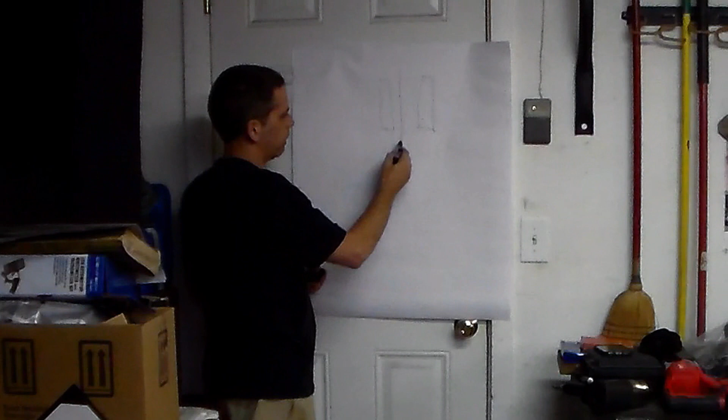So when I'm doing that, then I'll draw a guide here in like two parts. So this is our guide, and then this is our valve that's riding in the cylinder head. And you have a certain area of wear. It's not going to wear all the way to the bottom or the top, and you got an area where it's going to wear and stop.

So I'm measuring two different things in this case. I'm measuring the valve stem at what I call a top, middle, bottom. You can even call that out. And I'm measuring the valve guide at the top, middle, bottom as well here.

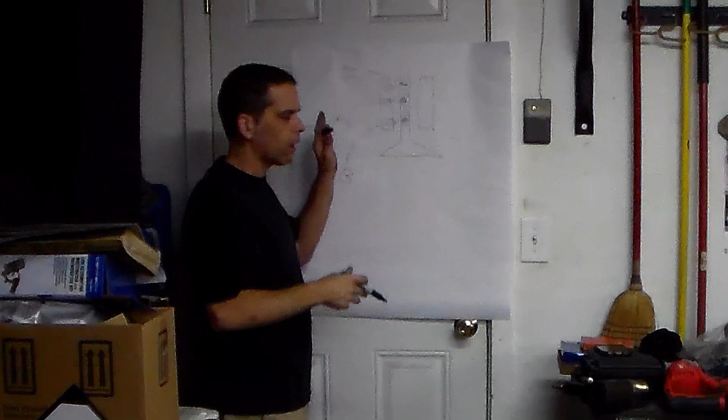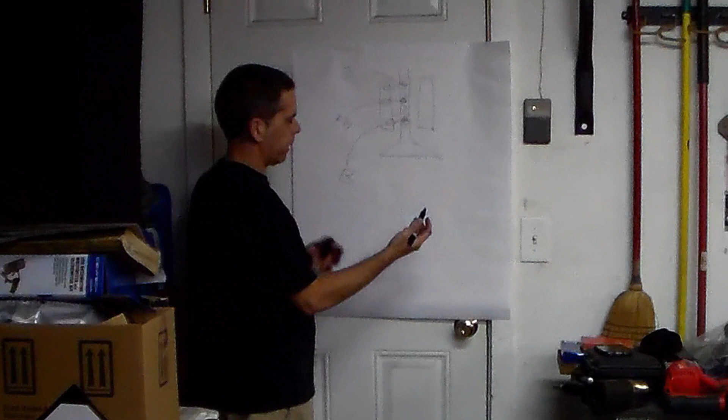And what I'm going to do then is I'm going to get top, middle, bottom for all 16 of these valves, and then I'm going to subtract the differences. So with the intake valves, you should have anywhere from 1 to 3 thousandths, and this is the intake.

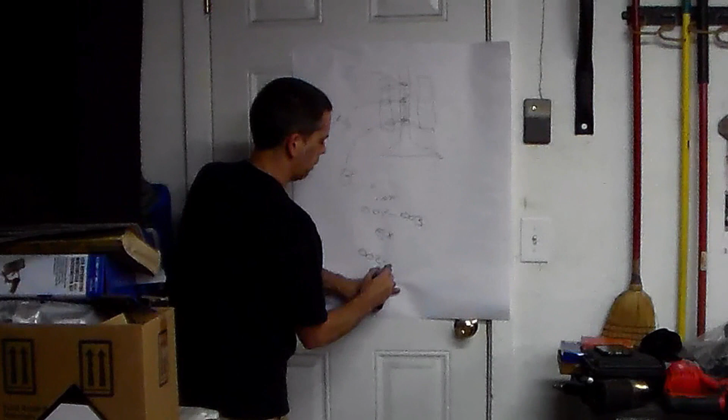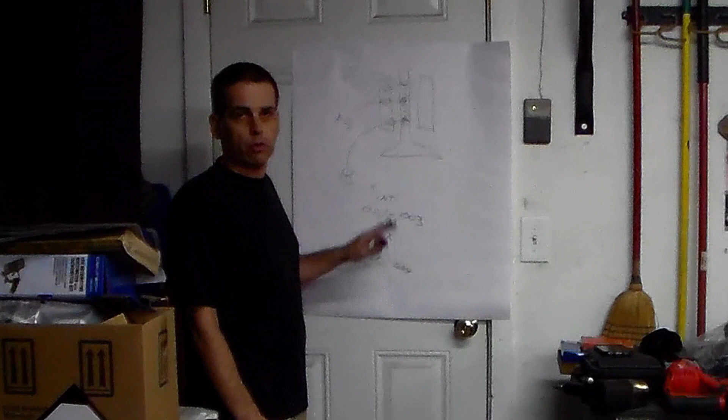And the exhaust should have, you're allowed 1 extra thousandths because of heat expansion with the exhaust valve. It's going to run hotter than the intake valve. Now always check your specs, of course, and see what the manufacturer recommends. But a good rule of thumb, especially with an old cast head like this, is again 1 to 3 thousandths clearance on the intake and 2 to 4 on the exhaust.

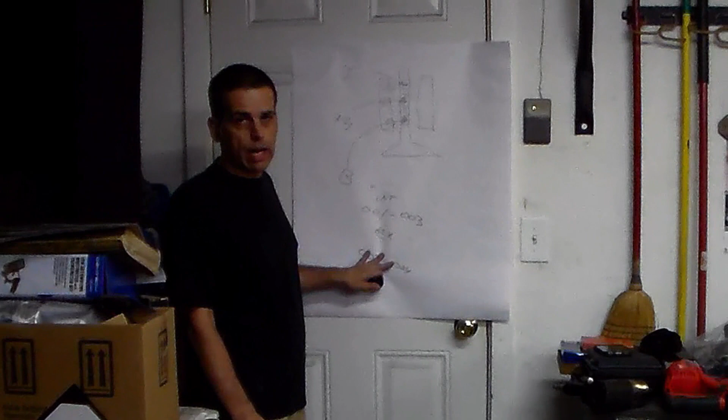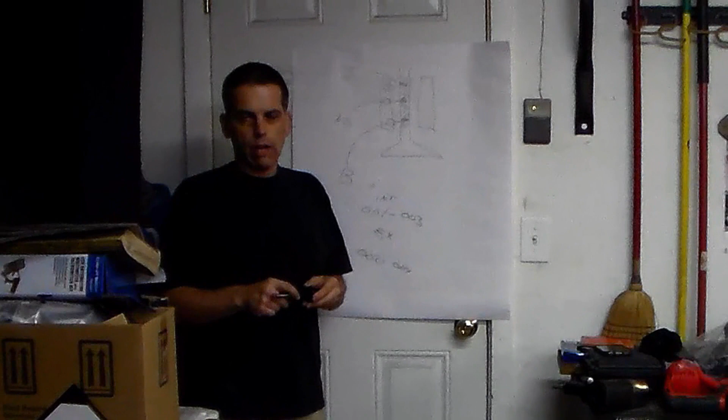If we have any more than these specs, then we're going to have the guides replaced, or if the valve stems look really, really scored, we will have to get new valves as well, because the guides might all be scored. Typically, unless you have an oil delivery problem or they were really running low on oil or had different issues, most of the time the valves will clean up.

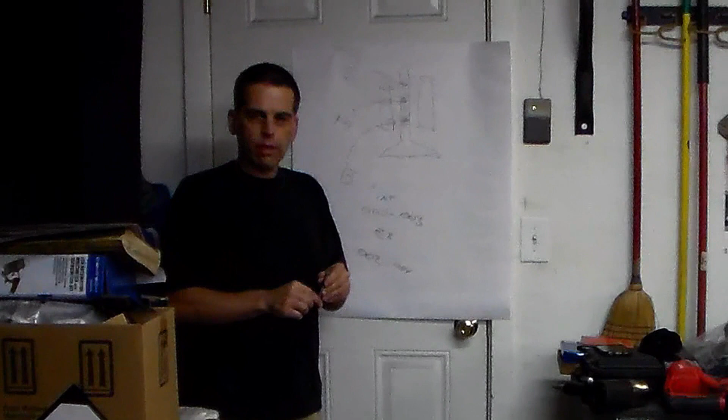You just have to regrind the face and true it to the seat, which we'll talk about another time. But most of the time you don't have to replace the valves. It's not a big deal. So you can always reuse them. So, I showed you this, let's jump back onto our cylinder head and let's get ready to disassemble it.

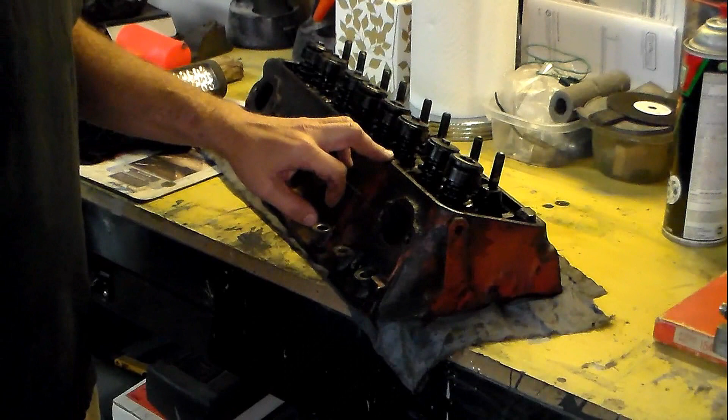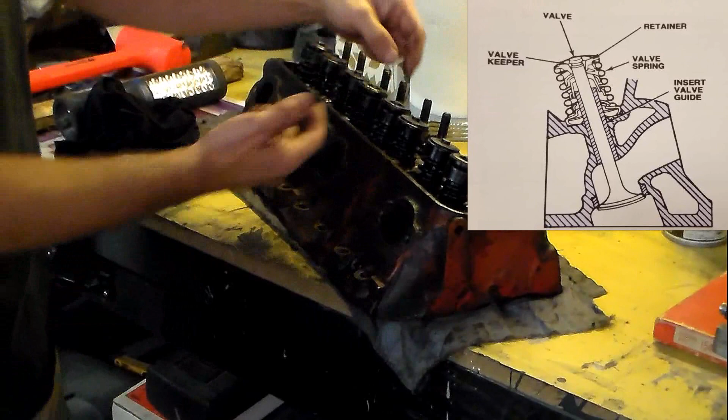Alright, so the first thing I want to do before I do anything is I'm going to take a socket and a hammer and tap on each one of these spring retainers. Because over time, the valve and the keeper are stuck together. And when you put the valve spring compressor on, it might be a little hard to compress. If you had a pneumatic one, it might be a little different. I have a mechanical spring compressor, so it could be a little difficult, but it just helps break this retainer free from the keepers from being on there for so many years and miles.

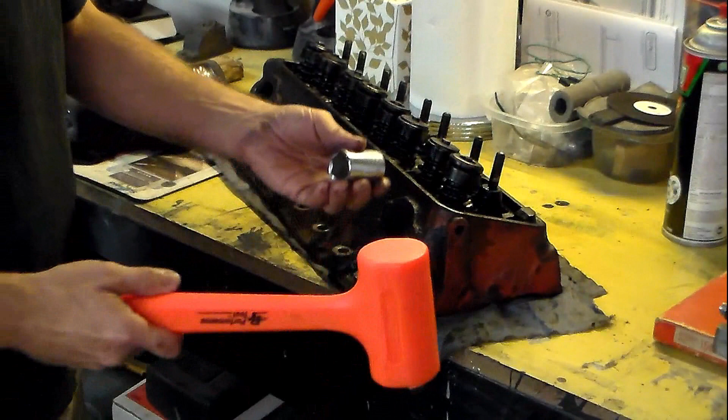So I'm just going to grab an ordinary socket like this and a plastic hammer. You can use a ball peen hammer as well, and just give it a tap like this. The spring will actually move a little bit, that's what you want. Alright, so then I just have a cheap valve spring compressor here. Again, this is a manual one. There's pneumatic and all different types.

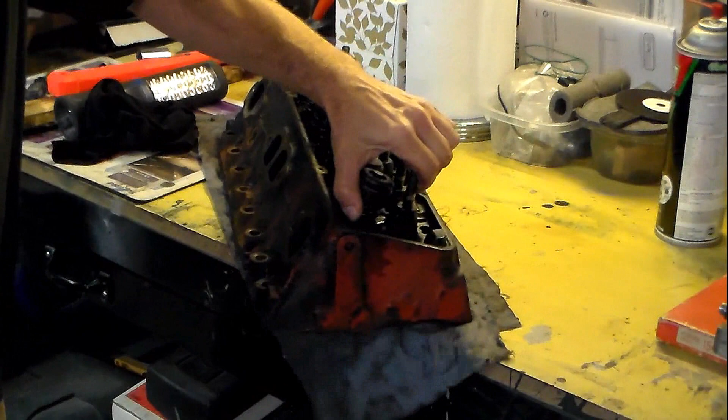And just to show what I'm doing, I normally would never disassemble a head like this, but I am going to leave it hang over a little bit like this, so I can get the spring compressor on, and you can see me take the retainer off here. I already have this set up because I already took a valve out of another head. This goes right in the center of the valve, and this goes across the retainer on the top. You might have to adjust it. You could probably rent these at an auto parts store. But again, I would never disassemble it like this. I just want to show you what I'm doing.

Go like this. Then I've compressed the valve. Now these are the keepers here. To get the keepers out, they might be a little stuck on from oil. And with these particular valves, they have a little pocket down there, and it's got a little tiny O-ring. You have to pop that O-ring out. It's actually a small seal. It probably was an O-ring at one time; right now it's really hard. Otherwise the valve won't be able to come out.

They did this to help the oil drain around the stem and not go into the guide and start burning oil, but they really didn't work very well, but that was 1973 technology. So there's the seal, I'm getting that out. And of course, always keep everything in order. Don't mix anything up, just like you would taking apart any part of the engine.

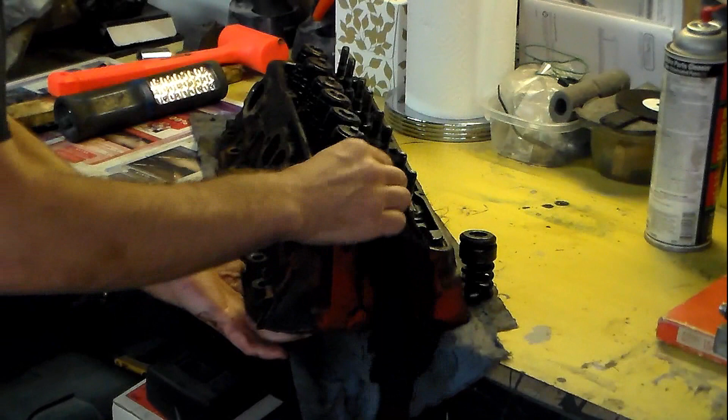Take it out. Now you never want to force it. You can actually get little burrs where these keepers sit from very high mileage, a lot of use in the car. And if you try to pull this down, if you got a burr, you're going to score the guide and probably damage it. So never force it.

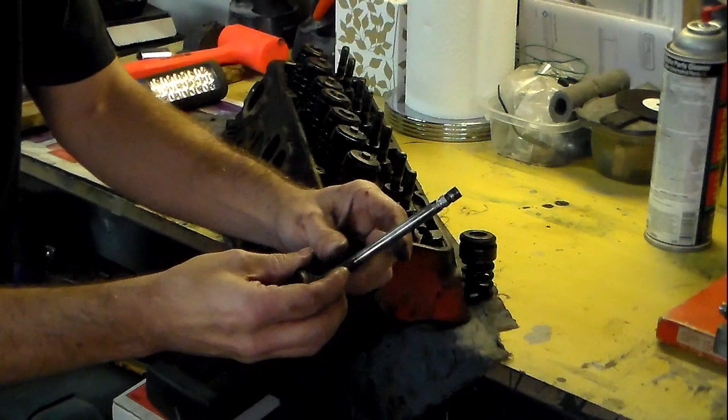Now this one I got all the sludge off, like I said. This one's going to come out really nice. And we got oil on our guide, that's good. You can get all the varnish off the top. But you can see then maybe a little better the shiny areas of where that was basically riding there into the guide and where you have to measure.

So now I need to clean the guide up. You want to make sure when you measure anything it's clean of any debris and oil. So I'm just going to put a rag at the bottom, just kind of spray it out, and try to get as much debris out as I can.

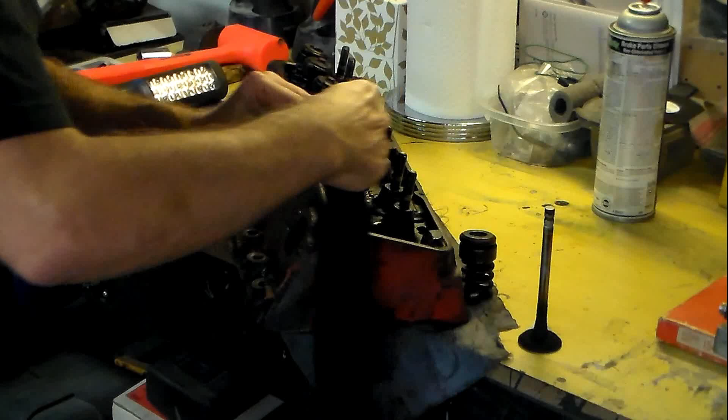Couldn't find any of my rifle brushes this morning, so just have to make do with what we have.

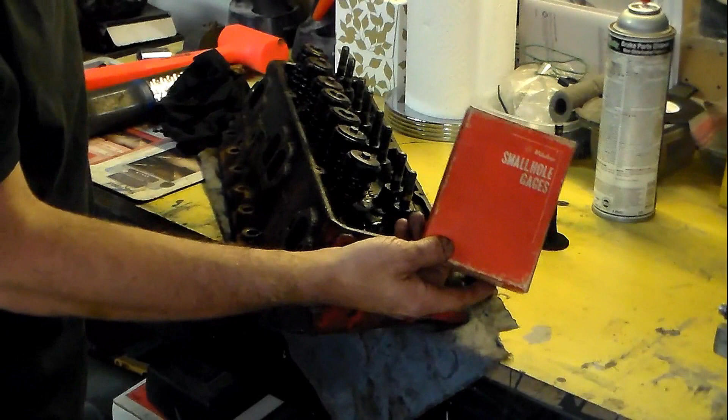Alright, so what am I going to use to measure the guide? I'm going to use a set of small hole gauges. These you can pick up pretty reasonable. I like to stick with old stuff because if it's not broken, it's probably better than a lot of stuff you can buy today. This is an old Mitutoyo set. And then this is the actual one that I'm going to use to measure.

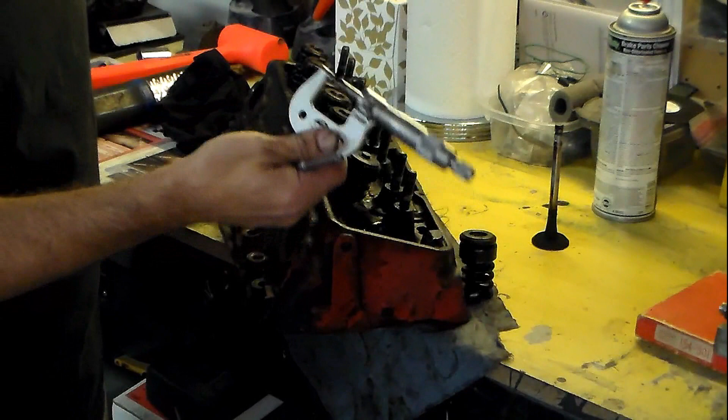And then to get the actual clearance, I'm going to use a micrometer. Now you can use a set of calipers. This is more accurate. I want to go down to 4 digits past the decimal point, and I want to get a very accurate measurement using this micrometer.

So remember I said earlier the rocker moves like this, so the valve's going to move back and forth. So I'm going to take my hole gauge and go in the center. This is what I'm going to call my top measurement, and these two expanding balls out in here are going to be across where the rocker sits. Where the rocker moves, it's going to have the most wear.

So then with this tool I'm just going to tighten it up just so it's a little bit snug. And I'm going to pop it out, and I'm going to get my measurement. So we have, looking at about 25, it's like we're looking at about 3399. So I'm going to write that measurement down, and I'm going to progress then to the middle and the bottom.

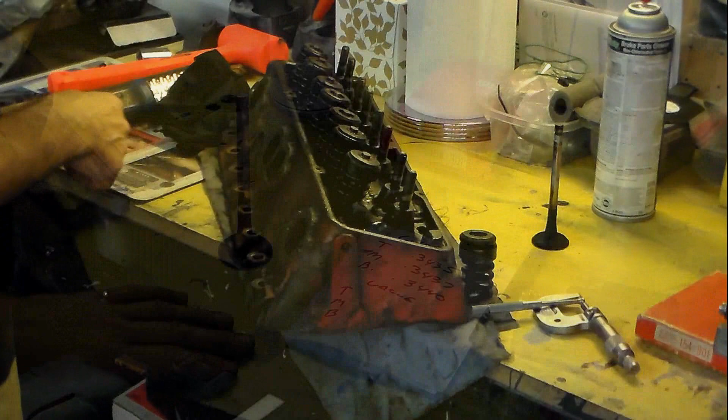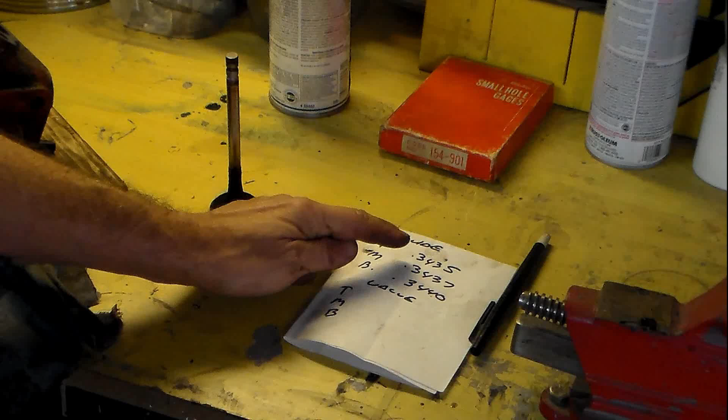So I just measured my guide in 3 places, and the measurement I gave you at the last cut, the 33 whatever, that was wrong. I was looking at the wrong numbers. Maybe I'll edit it out, maybe I won't. So with the top, middle, bottom for the guide, I got these 3 values, and again it's down to the 4th digit past the decimal place. It's more accurate than using a pair of calipers.

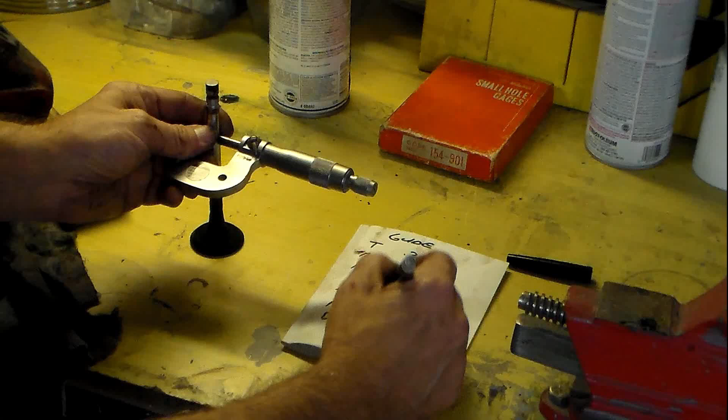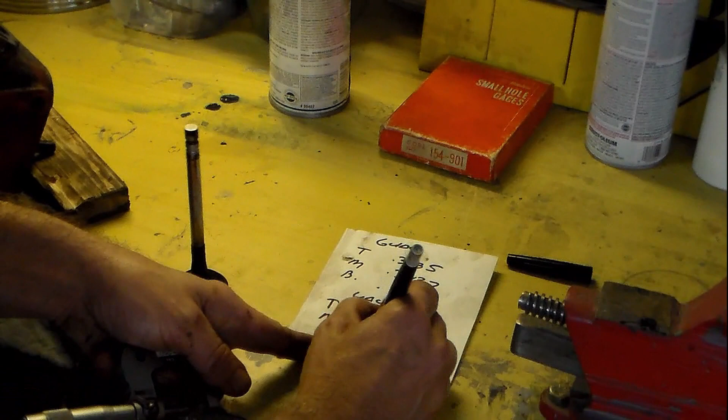Now I'm going to do the same thing with the valve stem. So what I'm going to do here is just measure top, middle, bottom, and that looks like 3412. 3412. 3410.

So I got 15 more to do. I just realized I'm not going to have enough paper, so I got to go scrounge up some more paper. But this is the process, and I'm going to put these all on a sheet of paper for you, and I'll spare you the boringness of doing the math, and I will show you everything that I calculated and see if our guides are good or bad or anything else you might have to do with this project.

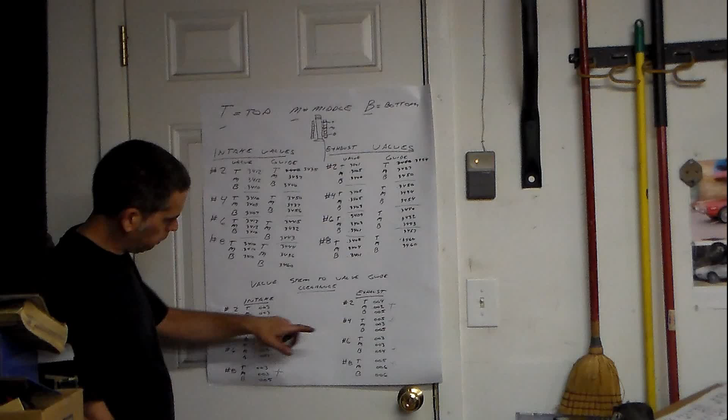I thought it'd be a little bit better, but getting to our max here, I really don't like that because it's not going to be a long-lasting valve job. Now I didn't use any of the decimals; I actually rounded them up. They might be somewhere like 0.0025, 0.0028, but again we're getting close to our max.

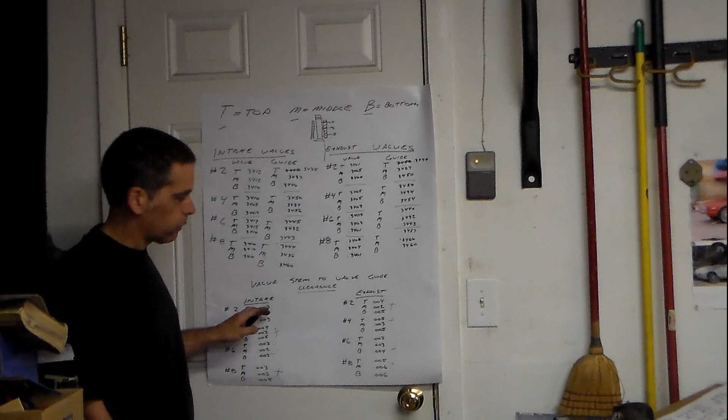So we definitely need 4 guides, and if we're going to replace them because we're getting close to our maximums, then I'll probably just go ahead and get all the valve guides replaced. Didn't want to do that. It's going to hurt our budget, but we'll just have to live with it. Well, I'll have to look at some other alternatives, maybe what I might want to do about cylinder heads.

Now, I'm not going to measure the other cylinder head for valve guide clearance, because from my experience, if you get these kind of numbers on one head, the heads are matched. I believe they're original to the car, so they're going to have the same kind of numbers. So I'm just going to assume that head has the same kind of wear, and we're going to get the valve guides replaced or do something different about the cylinder heads, like I said.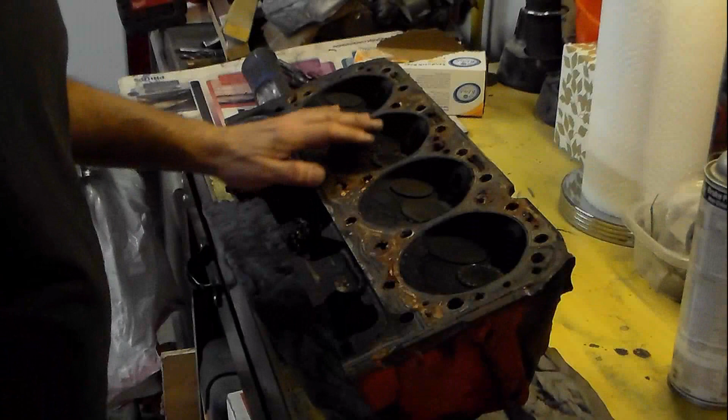So with that, this is done, and now we have to check the flatness of the cylinder head on the surface where the head gasket sits, where it sits on the deck. So let me clean up a little bit, and then I'll show you how we're going to accomplish that. So now we want to check our head here, make sure that it's flat and not warped. And to do that, this surface has got to be super clean.

So I'm going to wipe it first with brake clean, and I'm going to use these red Scotch-Brites on this angle grinder. I'm going to clean this whole area up, and then I'm going to use something with a flat edge on it and a feeler gauge to see how flat it is.

Now I know this is not a true machinist flat piece of metal and people are going to laugh at me, but it will give you some indicator if this is warped or not, and I have used this before and it saved me. This is a nice flat surface, but again it's not a true machinist flat surface. I'll still probably have the machine shop check it. I just want to check it first myself, and I want to give you an indicator of what the machine shop actually does.

So I'm going to spray this down with brake clean, try to get the oil off it, because the oil will dig into those Scotch-Brites and it chews up the pad pretty quick.

These are supposed to be holes, and this is where the coolant sat for a very long period of time. It's actually supposed to be a big hole like there. It just sat, and the head gasket only covers a little part of this with its sealing area, so that's another reason it all sits there. It also could be from not changing your coolant and not taking care of your engine. Things like this can happen, but in this case it's probably just from the coolant sitting in there for such a long period of time without being used.

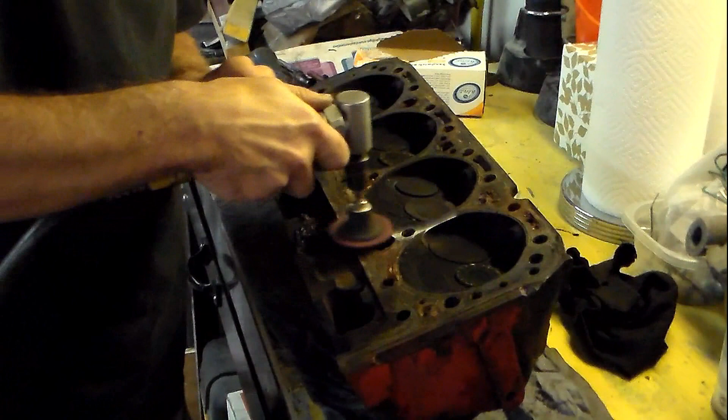Well, that job was invented before fun, because it certainly wasn't. So, I got this whole surface all cleaned up. It's definitely never a fun part of the job. It's always really messy. So all that gasket material and all the debris and everything's off. So what I'm going to do is take my straight edge and lay it in different parts of the head, and I'm going to see if I can get a feeler gauge under it.

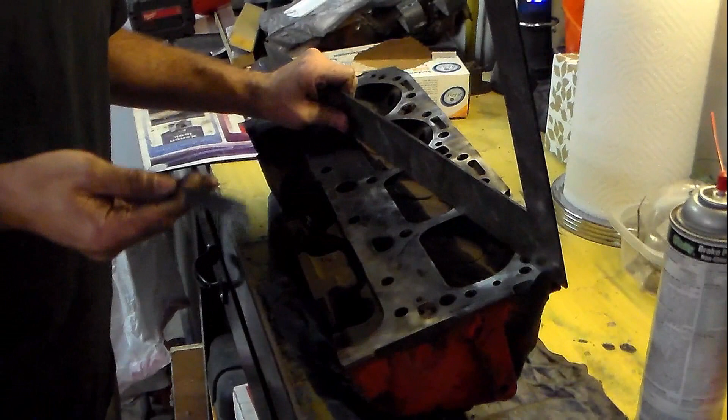Now, a good rule of thumb is a cylinder head gasket can make up for about 5 thousandths variation in any kind of waviness in this surface and the deck surface. Always of course check your service manual and make sure that spec is really true, or it could be as low as 2 or 3 thousandths depending on the type of head gasket, the material the block is made out of, the head gasket material, and everything else that goes along with that.

So for this, I'm just going to take this straight edge, and I have a 5 thousandths feeler gauge, and I'm going to see if I can get it under in these areas. And so far we're looking pretty good. Now if I could get it, I want to check it with the 6 thousandths. And if I can get the 6 thousandths under, then I have too much warpage, and I definitely want to get this surface cut. So what they do is stick it on a large machine, and they run a stone across it. Some older machines have stones, the new ones just have a flat cutting wheel or a disc or a bit. They go across and they just true this whole surface up.

So let me check it in certain other positions. Yeah, see, this is what I thought. The head most likely was not going to have any issues. So I like to check it in all these different spots and see if I can get this under here, there, here. I like to go in a bunch of different directions. So this is actually looking pretty good. So I have to clean up the other head, and then we'll have to do this. You got to make sure you hold it kind of flat, or you can get an unusual reading.

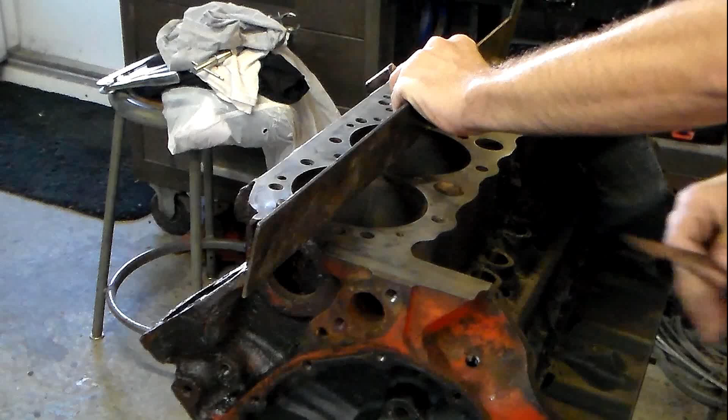So now that we got the cylinder heads out of the way, we're going to turn our attention back to the engine block. And the first thing we want to do is make sure that our deck surface here is completely flat. And to do that, we're going to follow the same process we did with the cylinder heads. So I've already cleaned this up with a Scotch-Brite and got as much of the debris off as I can. And then I'm going to take our straight edge, lay it on our deck surface and use our 5 thousandths feeler gauge in different areas, moving around the square, and see if I can get that 5 thousandths feeler gauge under it.

And if I can't, then I'm going to do the other side, and if that checks out, then we're going to go ahead and measure the cylinder walls. So I doubt I'm going to have any problems here. I have high confidence. When I tore this engine down, it didn't have any signs of overheating or any head gasket issues. And again, from what I'm doing right now, this side looks really good.

So I'm going to go ahead and do the other side, and if it's fine, then we're going to progress to measure the cylinder taper and out of round. And to do that, I'm going to show you an illustration, and then once that's done, we're going to go ahead and measure our cylinders, and we have to do a subtraction method like we did with the valve stem to valve guide clearance, and we'll see if we're in spec or out of spec, and see if we're going to have to bore these cylinders.

So to see if our cylinders are in spec, we've got to do 2 measurements. We've got to do a taper measurement and an out of round measurement. The first one I want to talk about is the out of round. So the cylinder receives the most amount of wear at the top due to the explosions of the air-fuel mixture. So if you look at the cylinder right at the top of the deck surface, but below where the ridge is,

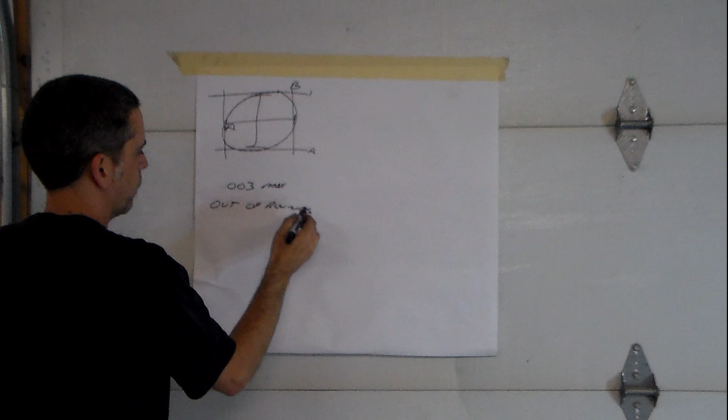we are going to take 2 measurements, an A and a B, a difference of one side versus the other side. Here, so this will be a B and this will be an A. So when we take that, we're going to subtract the 2 and compare the specs. Now, a good rule of thumb, which I'm going to use, is you don't want any more than 3 thousandths max for the out of round. But again, always check the manufacturer's specs and see what they say. If it is, we're going to have the engine bored to true them up to a true circle.

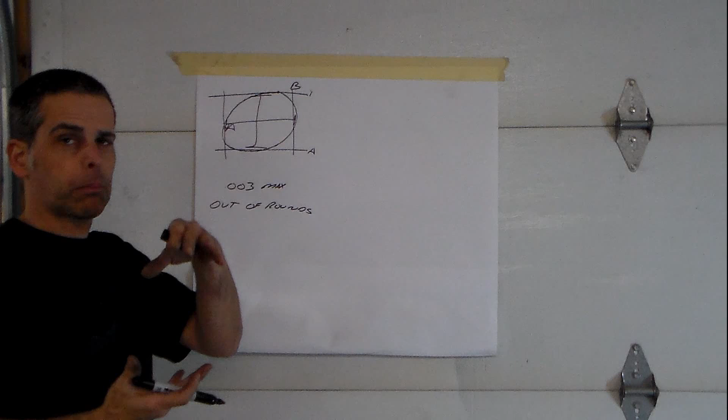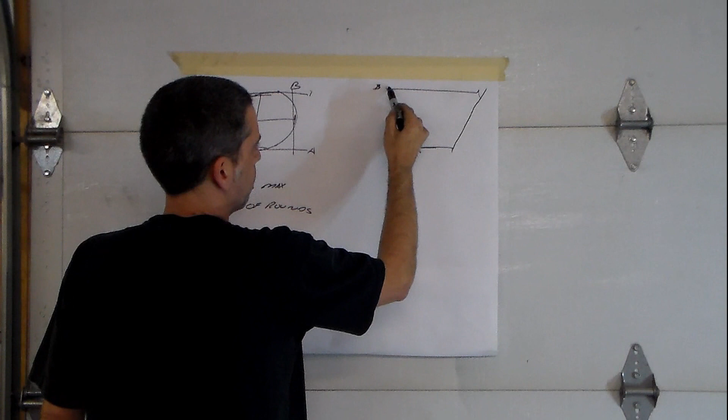The next one we've got to do is measure the taper. Now, the measure of taper is the difference from the top to the bottom. So if the top of the engine cylinder sees the most amount of wear, the bottom's going to see the least amount of wear. And this is a great exaggeration, of course, but taper looks something like this. And you have an A measurement and you have a B measurement. So you want to take a measurement right at the bottom and then right at the top, right below that ridge. And then subtract; all these will be a B minus an A, and you get a measurement. Do that for all 8 cylinders.

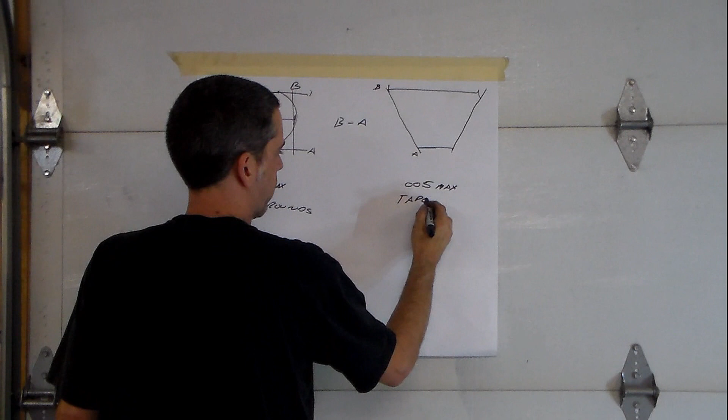And you don't want any more difference than 5 thousandths. 5 thousandths max. But always check the specs. If you do, you have to have the cylinder bored again and true up the round surfaces. So by doing both of these, we'll see if the cylinders are in spec or out of spec. If they are in spec, then we can just go ahead and not have to replace anything and just use the original pistons, which is my intent as we originally talked about, because I want to save money.

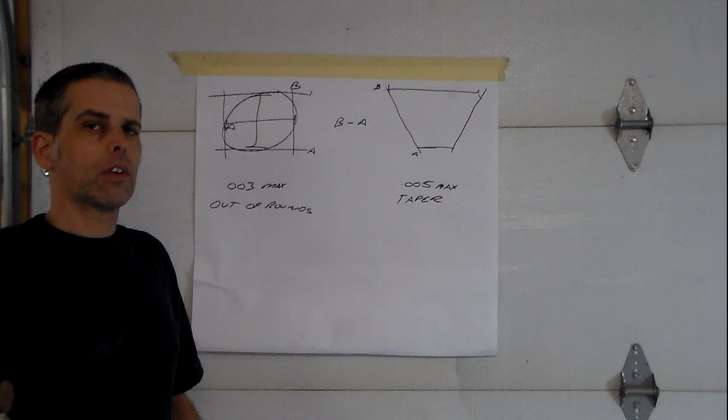So let's move away from this, and the first step I'm going to do is make sure the cylinders are really clean, and I'm going to get out the telescoping gauges, and then we're going to go ahead and do these measurements. I'm going to write them all down again, and we'll compare the specs. So before I take the actual measurements, I wanted to talk a little bit more about where the actual points are in the cylinder where you should be using a telescoping gauge and taking the measurements.

So the first one I want to talk about then is the taper. So the piston skirt rides in these 2 areas here in the cylinder. So as the piston moves up and down, the crankshaft throw is actually moving it back and forth like this. So this is the other area where the most wear is going to occur. And if you see it here, it's not going to ride, of course, in this exact position because it's going to be below the deck surface, but this is actually where it's going to ride.

So to take your taper measurement, this area would be your top, and then directly down below, right where you see it doesn't have hardly any wear, that's going to be the bottom measurement. Now to take the out of round, we're going to keep that same measurement here for a B, and then we're going to subtract it from this measurement we're going to take, and remember we're going to take it right under this lip where the ridge stops, and that's going to be our A measurement.

And by doing that, then we're going to be able to subtract these and get our wear on our cylinders, and hopefully we will be in spec and we won't have to do any boring into this. So let me put this piston away, and let me get out the tools that we need, and then we're going to start measuring these cylinders.

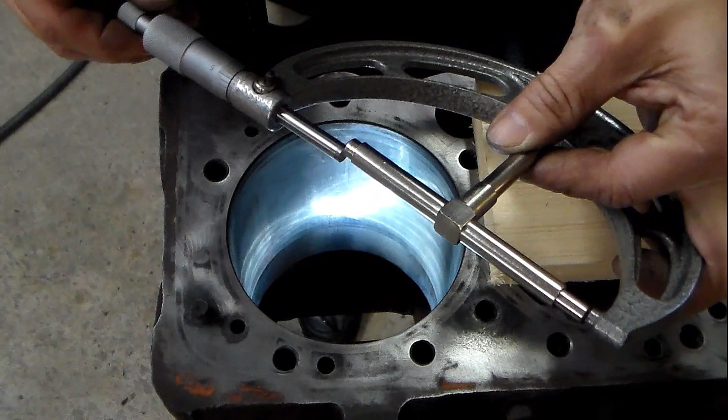And take your micrometer, and we'll see what kind of number we get. Looks like we got, sure, always a little tricky to do. Looks like we got 4.0022, which is actually a really good number. It's a good number because we know this engine has not been bored. It appears to be all stock, and a small block Chevy 350 has a 4-inch bore.

So I'm going to write that number down, and remember this is our B. I can write it on the block here, for our out of round, and then this will be our A here, and then we'll need our B to measure our out of round. So we had 4.0022, and then we'll measure the other side now, same process. Get it so it's a little snug.

And we've got 4.002, looks like 3. So we had a real good number there. Now let's move to the out of round. I'm going to go all the way down to the bottom. Go back and forth, measure it, tighten it up.

And then not surprisingly so, this number at the bottom is 4 inches because it's never been bored. So we're going to write that number down. And then we'll figure out a little math and see where we're at. So you can see here I got some very good numbers. So for number 1 cylinder, for the out of round, I had hardly anything. Then for the taper, a little over 2 thousandths. So these are really good numbers.

So if the rest of the cylinders check out, this will be really good, and I'm not going to get this engine bored. I'm just going to reuse the pistons. So I am going to have to grab some more paper. I don't have enough, and I'm going to continue doing the same thing on all the cylinders. And then I will write everything on a sheet of paper again, and I'll brief you on what I found.

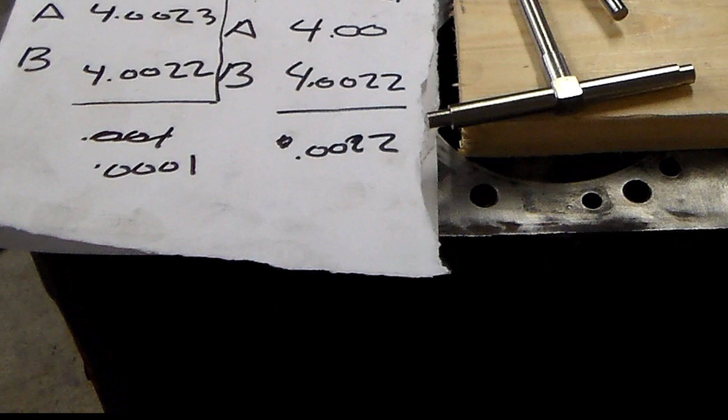So I just finished measuring all the cylinders, and I transposed them onto the sheet so you could have a better understanding of what's going on. And the numbers look exceptionally good. They look much better actually than I thought they would. I thought they'd be in spec, but I didn't think they would be this good. So you can see our out of round, we didn't even crack the 1 thousandth of an inch mark. And on the taper, most of them are a little over 1 thousandth, and then we have some in the 2 thousandths range. But these are all well in spec. They're very good numbers, so we can reuse the pistons.

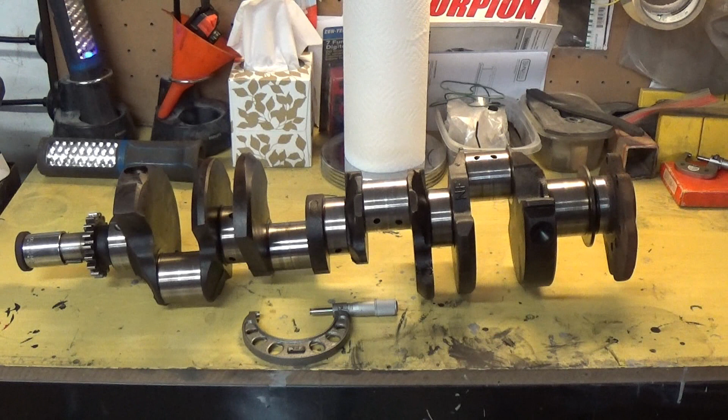So there's one last thing I want to briefly show before we wrap up and we know what parts to take to the machine shop. And that is I want to measure my crankshaft rod and main bearing journals and see which ones might be out of spec, because if they are out of spec, we're going to have to get the crank ground.

Now, as I spoke earlier during the teardown in another video, everything looks really good in this, and I don't think we're going to have any issues, but you never know with the looks. You always want to take the micrometer and measure and see if everything's within specification or if it's out.

Now, to do this, I'm going to take my 2 to 3 inch micrometer, and I'm going to do what we just did similar to the cylinders. I'm going to do 2 different measurements here and here, subtract the difference. That will be your out of round for this one, and then we're going to do here to here, subtract the difference. That is going to be the out of round for this journal.

And then we're going to take the highest measurement we got for this one and the lowest one for this one, or vice versa. Whatever the highest one is and the lowest one is, we're going to subtract the difference, and then that's going to be our taper, and see how much taper we have from the one to the other.

Now, from my experience, this is a narrower bearing surface for your main bearing, and taking it here and here, I'll probably take the 2 different measurements, but the way this looks, most likely this is going to be the same measurement from one side to the other. Where I'm most concerned is the main bearing that has the widest one for my thrust bearing, and that one I'll actually do the 2 different measurements and see if it's got any taper.

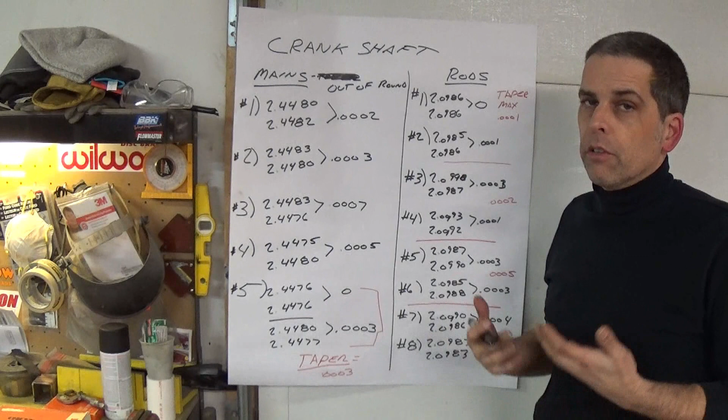So you see here, we have all our out of round for our mains. They're not even at 1,000ths, which is the service limit. So if we hit 1,000ths, then we would have to actually have the crankshaft ground. Now you see, as I was talking about earlier, I did not write the taper down. I did the measurement, but they were about the same number, so I just didn't worry about it.

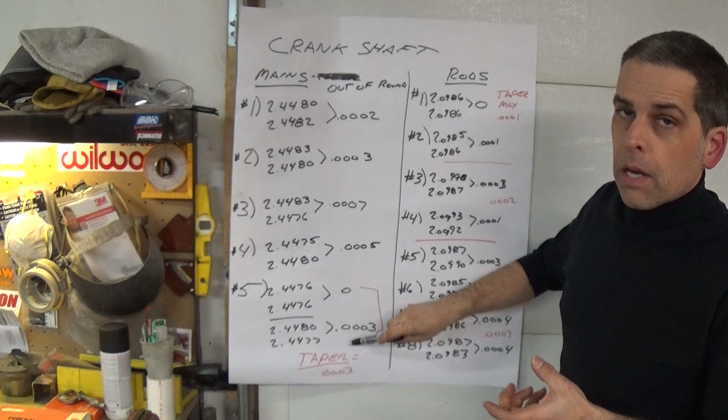So we have really good numbers, but I did do the taper on the number 5, which is the widest main bearing, and it has the thrust washer built into it. And again, we didn't get to 1,000ths.

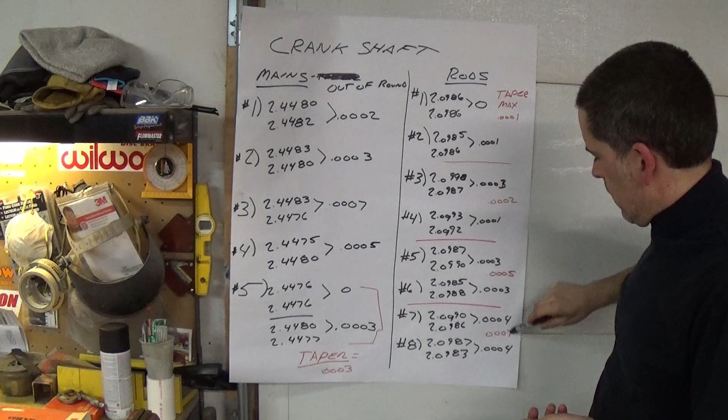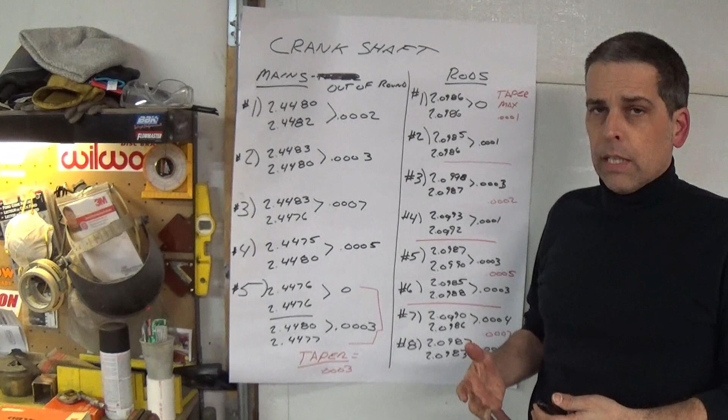Now the same thing with the rod journals here. I did all the out of round measurements here. We didn't even crack 1,000ths. And then I took the largest and smallest numbers, like I was saying, subtracted the differences, and again, we didn't crack the 1,000ths mark. So real good news, the crankshaft is good, and now we're going to go ahead and gather up the parts that we already figured out we have to take to the machine shop and get all squared away.

So that wraps up another fantastic show. Once we get all these parts back from the machine shop, we're going to start assembling them, and I'm going to show you step by step how to rebuild your own engine. Save yourself a lot of money, and it's also a personal satisfaction of doing all this yourself.